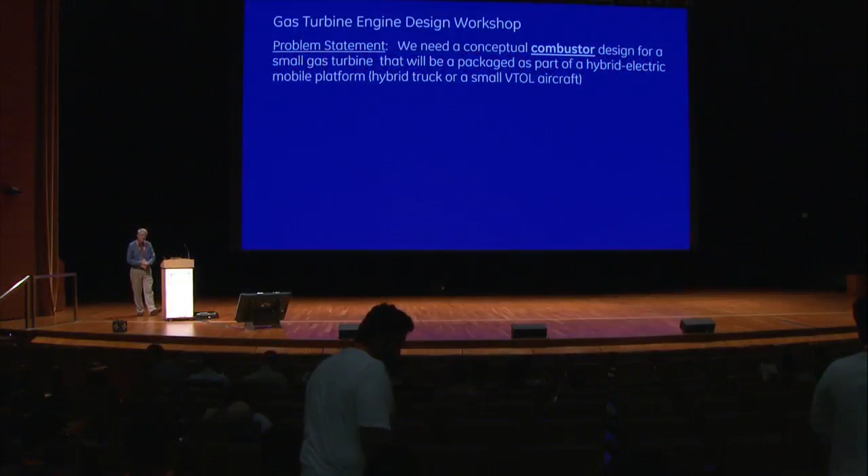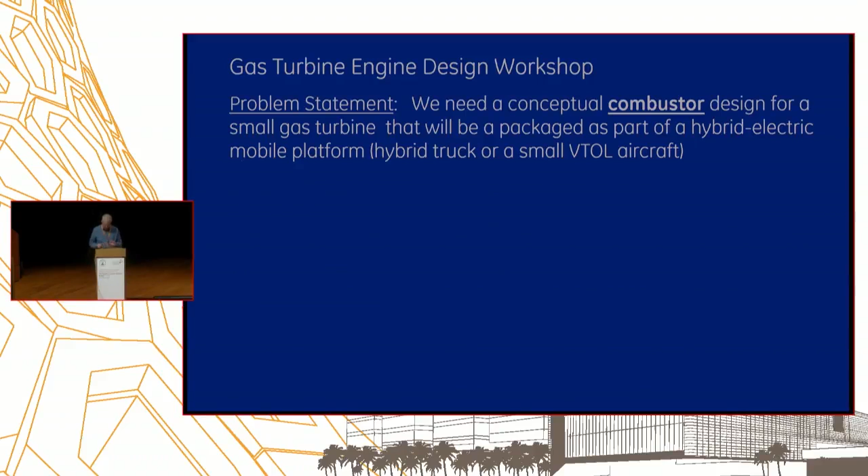It's almost 1:20. So I left you with a question, and I thought I'd start by explaining a little bit why, and then we can talk about what you're going to do and how you're going to help me.

So here's the thought. In today's world, gas turbines tend to be big and used for things like propulsion, and reciprocating engines tend to be used for small applications and sometimes grow into big ones. I thought I'd show this plot. This is a plot of, if you're thinking propulsion, a mobile platform, whether it's on the ground or in the air, you probably want to think about power to weight.

This is where gas turbines typically excel because they're very compact. They don't need to have the same number of auxiliary systems. They don't have the equivalent of a crankshaft and connecting rods, things that are pretty heavy. So this is a plot, non-dimensionalized, but it's based on some real data of a particular gas turbine and a few reciprocating engines. What you notice is reciprocating engines can be much more efficient.

So if you ask the question, why would you consider a gas turbine for a lot of applications, you probably wouldn't. Especially if you look at a gas turbine at part load, its performance falls off. As I said before, once you're at full speed, your shaft is turning at its desired speed, and you're pushing all the air through. So all the losses associated with compressing and expanding air are there. Then as you add more fuel, it gets more and more efficient to its peak point. So if you have an engine that needs to vary in load a lot, reciprocating engines are even more valuable.

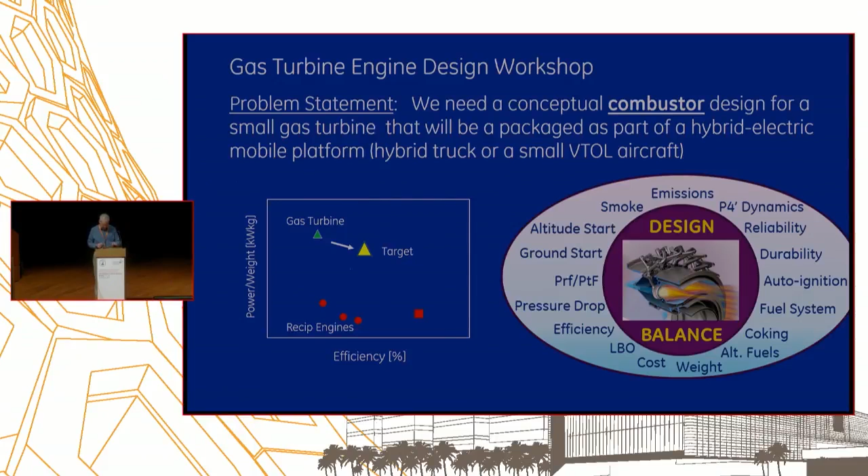And to start with, I just wanted to spend some time talking about requirements. Bear with me, because instead of a blackboard, I'm going to use a stylus here and write on the board. So you're going to see my handwriting through a stylus. And if it's not working, tell me.

So first of all, if you sort of think about the top 10 list, what does a combustor have to do? Help me write a list of requirements. It has to diffuse the flow, okay? And why is that important?

Okay, actually, and that's awesome. I was going to get to that later, but I'll diffuse the flow because that's an important point.

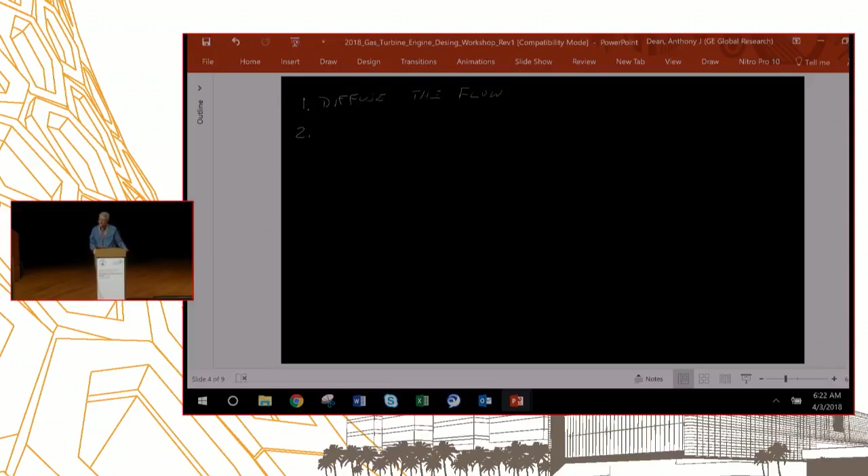Okay, let's talk about the function of the combustor. Why do we have a combustor in the first place? Burn the fuel, okay? So really, I've literally had these design conversations. Someone says, I got a great idea, and let's say the combustion efficiency is 98%. Does that feel good?

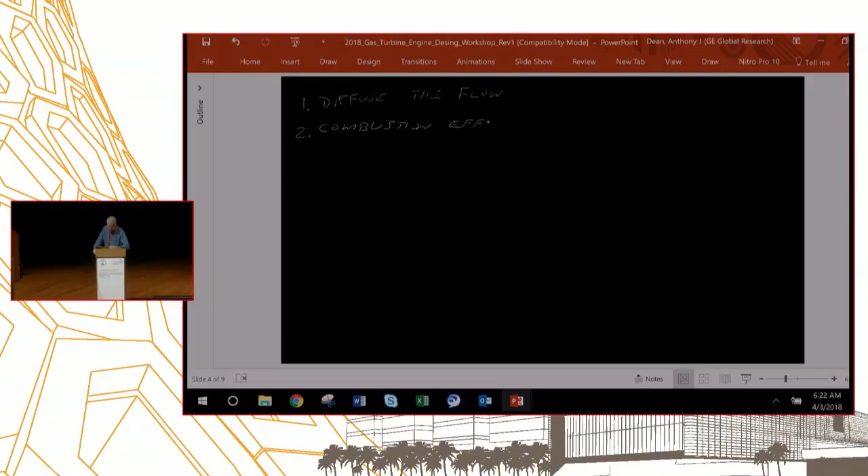98% combustion efficiency? That is awful. And there's two reasons why it's awful. First of all, we do all this work to make efficient cycles, and we try to control losses and have efficient components. But if I'm not burning the fuel, I'm going to have all those unwanted products we talked about, CO, unburned hydrocarbons. So you really want to be very high efficiency, way more than 98%, to be a practical and useful device. There are cases, if you look at an old two-stroke marine engine that goes in the back of a fishing boat, those are not very efficient. But that's because people aren't using them for many hours in a day necessarily, and there are reasons why they chose that. But for most engines, it's got to be much higher.

What's another requirement? Because if you start with the requirements, then we can think about a design. So, other requirements?

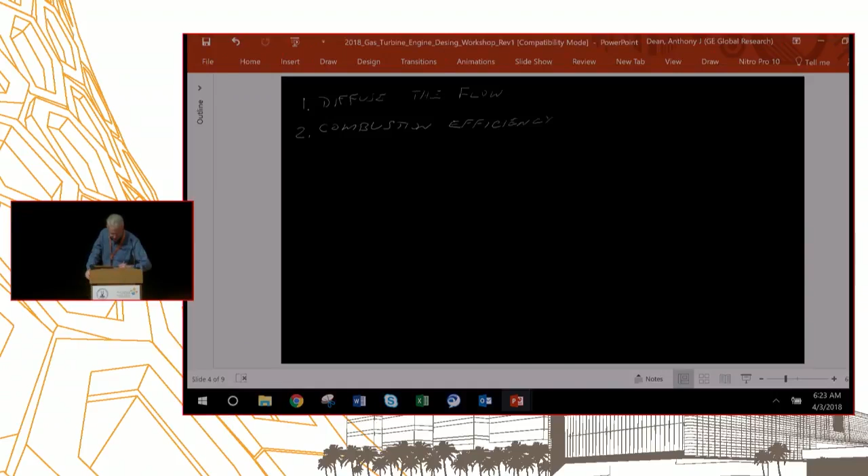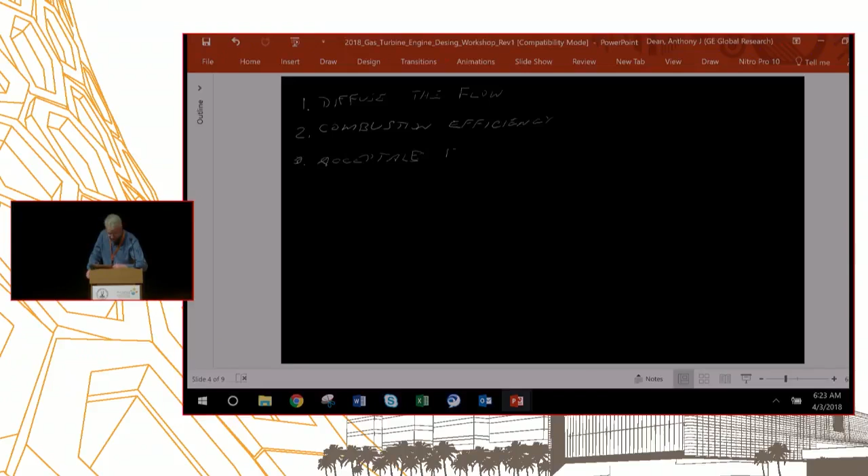Yeah, so achieve the - in fact, I'm going to build on that and just think about getting the right temperature for the turbine and temperature distribution. I'll say acceptable, and all of these things can be turned into numbers. But there's a notion called profile and pattern factor for an engine. Because if you're a turbine designer, you don't have to have the temperature be perfectly uniform, but for sure you have to know what it's going to be. So I'll say acceptable temperature for turbine. For example, if you make the combustor too short, you might end up with really hot streaks, in addition to other problems like maybe incomplete combustion. What's another key requirement?

In the end, mixture ratio - so tell me more what you're thinking. Is it the degree of mixing? What is it about the mixture ratio? So I'll just say, and again, I'll use the term acceptable mixing. If it's a rich combustor, it may get a different requirement to be acceptable versus lean. And where my head went when you said that was, in the end, the fuel-to-air ratio is given to a combustion designer by the cycle. The cycle is going to say there's this much air, you got to make the power we said we're going to make, you're going to add this much fuel. So in the end, the overall fuel-air ratio is given to us as an input. But as a designer, my requirement then is to take that fuel-air ratio and decide, for example, how hot to make the reaction zone, right? Where to put the air, and I can move that air around. Other requirements?

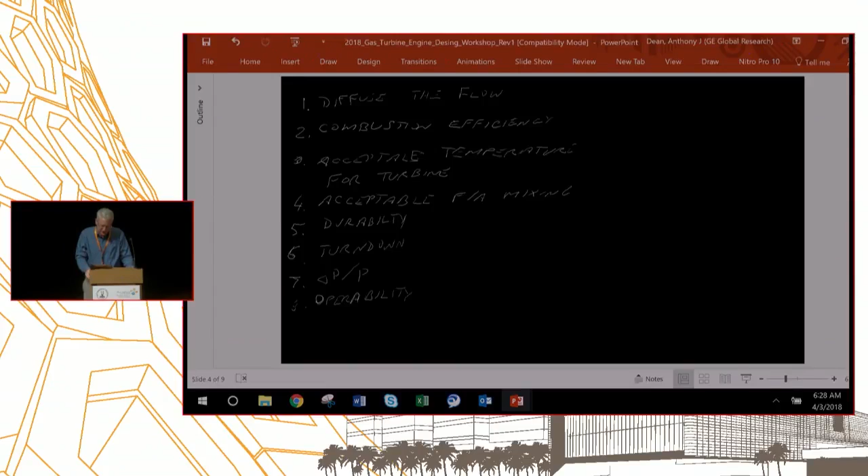You're actually doing a great job. I've got a list I'm looking at, and you've got eight of the items on the list. What about when you buy a machine? What's important when you buy something?

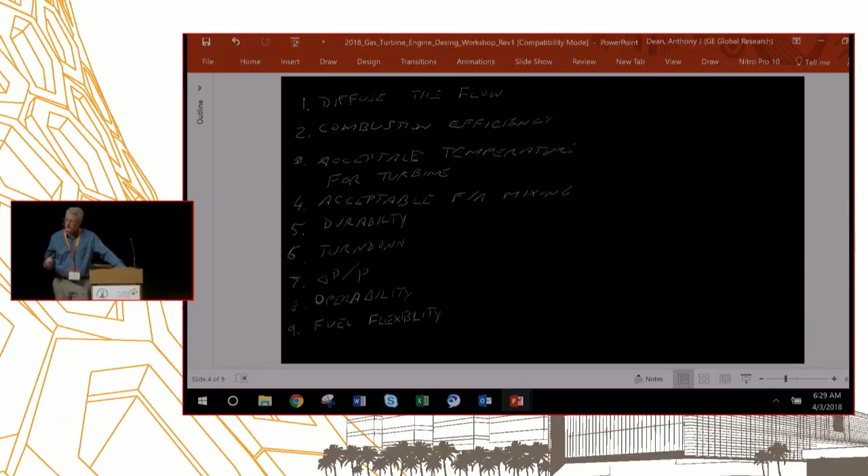Fuel. Are you sure that the fuel you have is the one you'll always have? Especially for utilities, one thing I didn't realize until I was in this industry is that if you want to build a power plant, often you're using someone else's money. So it involves a bank, it might even involve insurance folks. And they only care about one thing: are they going to get their money back, plus some reasonable return?

So they worry about whether the machine itself is going to be reliable, but they also worry about what if that fuel is not available and you had to burn something else. So fuel flexibility is sometimes more of a theoretical construct than a practical one, because a gas pipeline might be very, very reliable. But in order to get approved for that bank loan, you may need to show that on a bad day, you could burn a different fuel. That often drives some of the design.

Other thoughts? Geometry. So tell me what you're thinking. Perfect, so you've got to integrate it with the rest of the engine.

Turbo machinery designers have lots of interesting thoughts. If it's a compressor, is it an axial compressor or a radial compressor? So the air either comes straight at you along the axis of the shaft, or it might come radially outward, and then it's got to turn. So it's got to be compatible with the engine.

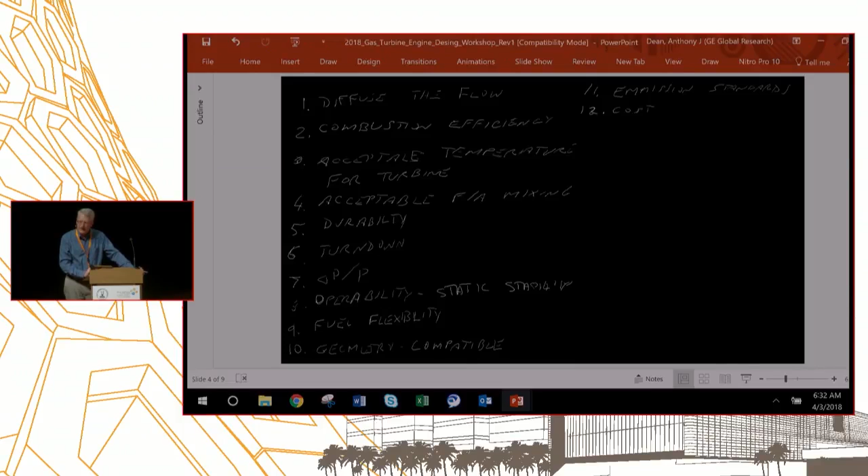In the back? Absolutely, right? So what I've learned is engineers are very creative. And actually, they become even more creative when you tell them cost is important too. But sometimes we want to add features, and a lot of conversation becomes around whether an idea buys its way onto the engine. It can be a great idea, it can even work really well, but is it worth the cost?

And the cost sometimes is actual money, the cost can be weight, it can be a cost in reliability. So there's all these things you've got to think about. But ultimately, if you're going to sell something for a profit, you've got to make sure you can sell it and make it at a reasonable cost.

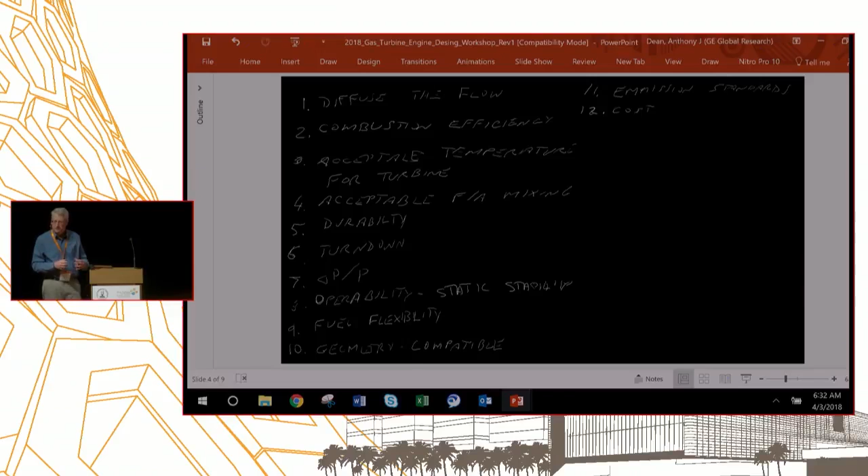I think we've got a great list. I'm just looking at my list here - I think you got a couple more I didn't have. Anything else anybody wants to add? Sorry? Insulation.

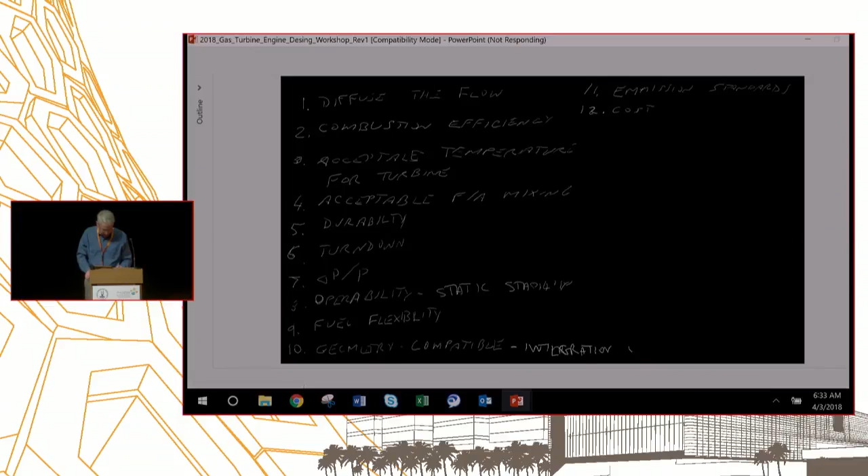Could be. So that really is integration with the engine - whatever the engine needs, it may require insulation, it may not, it depends.

One more in the back? Sorry? Power out? Yeah, and so in the end, that translates to - typically that's an engine requirement, but it's really the fuel-to-air ratio you've got to hit, it's about your T-exit for your combustor, right? It's whatever the cycle is demanding of you to achieve that.

One more? Sorry? Control, absolutely - so that gets into operability, I'll put controls here as well. Learning how to write with the pen here. Great, so that's not bad. We've got a really good list here.

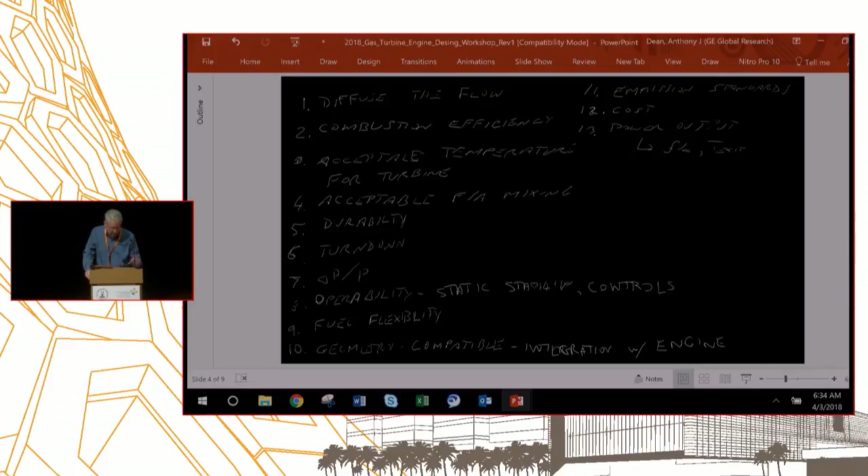Let me jump to the next page. And I think, because I have - once I learn how to change pages here.

And next, here's a nice tidy list of what I came up with.

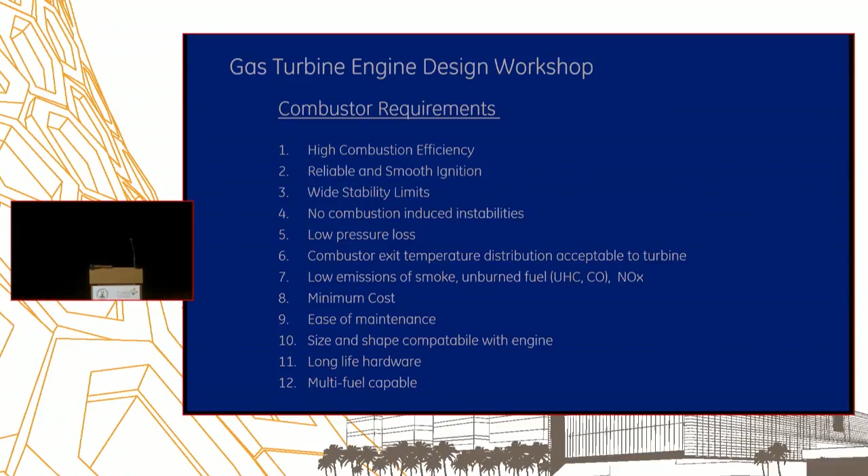I want to give credit to a lot of this section I'm talking about. In fact, I'll show you. There's a fantastic book, if you're interested in gas turbines, called Gas Turbine Combustion, by Arthur Lefebvre, a very well-known person in the field. I had the pleasure to meet him a couple times. He was visible at conferences and went around to companies and paid visits. He did an awesome job collecting the information that others put together, and he was also very active himself with his own research group. This isn't the newest version of the book, I think there's a new one now.

There's also a great book, Atomization and Sprays. But a lot of the material I'm using this afternoon really is pulled from the Gas Turbine Combustion book. It really sets the standard and gives the right fundamentals.

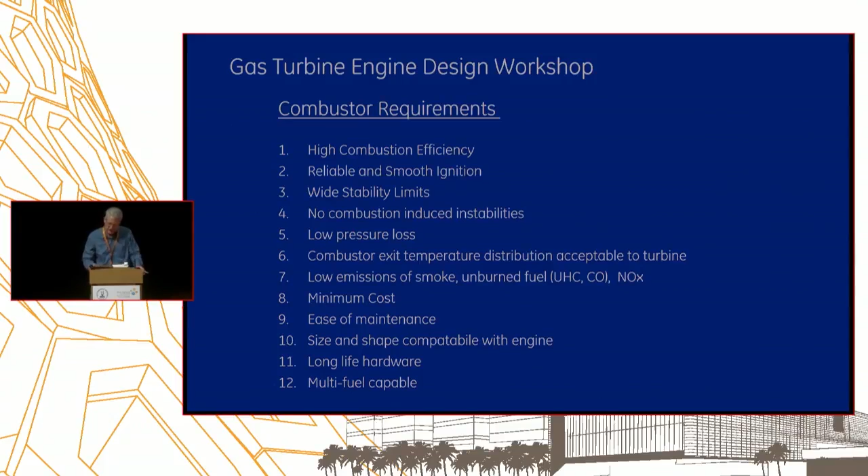So I wanted to go a little deeper on a couple things before we go into our exercise, and really help think through what a combustor needs to do, and what are some of the important things. So if you think about the simplest implementation, I have a duct and I have air going through.

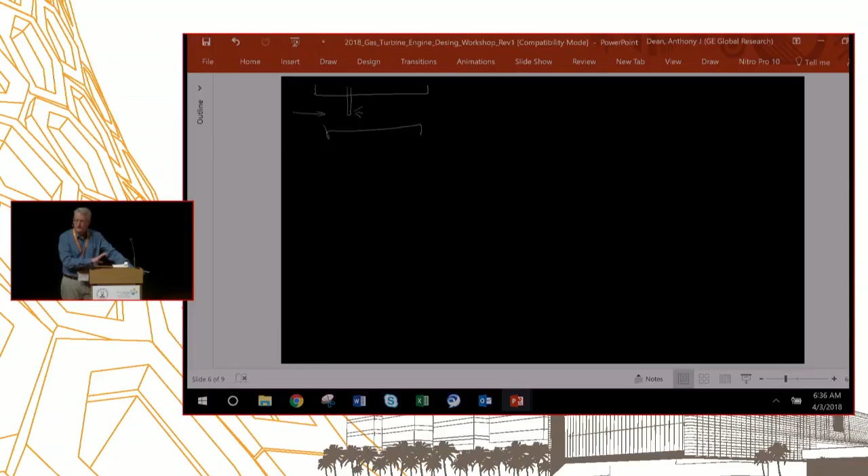This could be an annular duct, say what's coming out of the compressor. So if I want to squirt fuel in, one could imagine if you're trying to make the simplest combustor possible, you would simply stick a fuel nozzle in, it would spray some fuel in, and we'd be done. So help me out, what are the things that are not good about this as a combustion system? What would be the limitations compared to that requirements list?

Absolutely, so actually we've got to draw this a little differently. And why is that important? Why is it important to slow the air down?

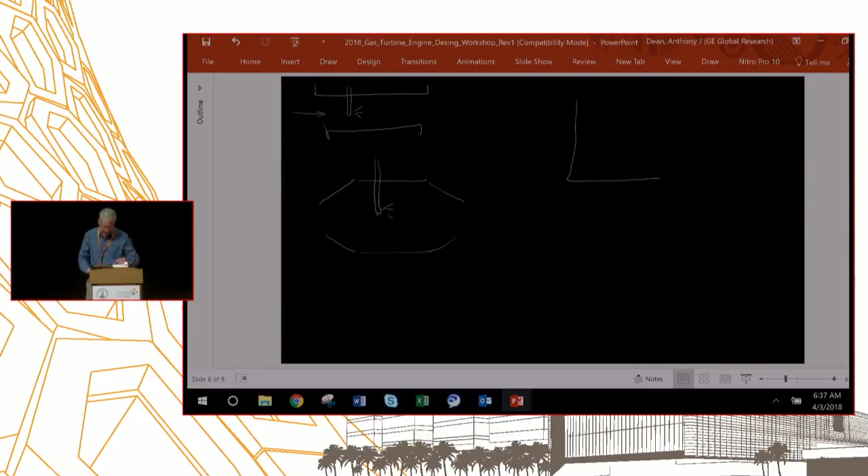Well, we'll get to that, because this may help, but will it be good enough? The thought I want to leave you with is a critical curve around - we said that delta P over P is very important - and if I were to talk about the velocity, I'll put it in terms of Mach number, the Mach number at the place of heat addition. So the Mach number when I'm adding heat. Is that a steady curve, or what do you think it does?

It decreases? Actually it does the opposite. If I'm at very low velocity, I can add heat to air and life is good, okay? But if I'm high velocity, and actually it's a quadratic relationship - on this curve I'll give you some typical numbers. If I'm at Mach 0.1, I'll see about a 1% pressure drop. So even if I'm aerodynamically beautiful in terms of not having flow structures that cause pressure drops, just the fact that I'm releasing heat into high velocity fluid causes this.

And so if I get to a Mach number of 0.2, I can be - I'm just looking, and it depends how much heat I'm adding. A typical heat addition would be a temperature ratio, on absolute coordinates, of about a factor of 3. That's why the density will change. But I could go all the way up to 6%.

So if we have a budget of 5%, and I said I want to be an awesome combustor, right, I'm going to be high velocity, I'm not going to take that air from the compressor and slow it down, because why would I have a diffuser and all that claptrap? Well, I've suddenly lost my pressure budget, right, just because of heat addition at high Mach number. So fundamentally, you've got to slow the flow down, to something below Mach 0.1 would be a good rule of thumb.

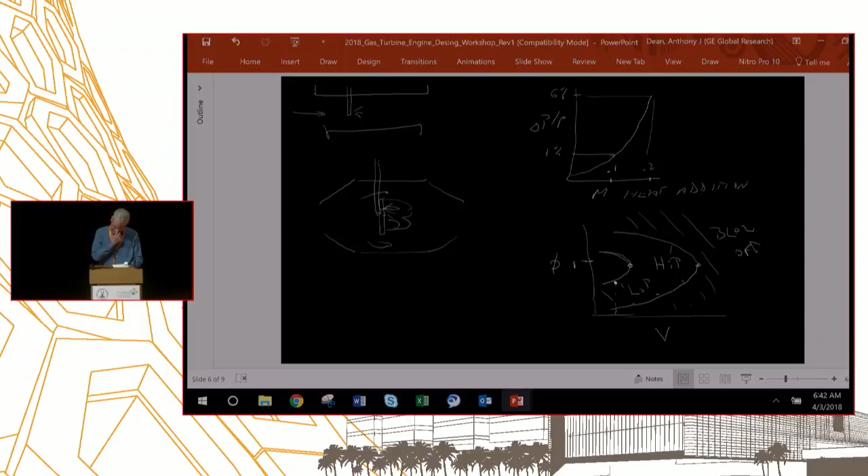And then I got to say, oh, and by the way, I'm not actually phi of one, because that would be high temperatures and maybe high NOx. So now I'm somewhere leaner. And now I've got to be thinking, okay, what's that velocity for my flame stabilization method? So that becomes something to worry about.

Think about the other requirements that we have. What's the other issue? So there's more issues. We've got to sort of add more components. What's another component you want to add to what we've drawn?

Fantastic. So imagine that if this is sort of the out on the outer, I'll have to say this is an annular combustor and this is the outer part. That's the casing. I need to put a box around this because I don't want that flame to have hot products hit the wall of my pressure vessel.

One of the fundamental parts of a gas turbine is typically we have cold structures that take the pressure and we have hot structures that take the temperature and maybe handle the pressure drop across the combustor, but they don't have to withstand the whole pressure ratio.

So we've got to start to put a boundary around this thing, and that then starts to look like the cross sections you've seen. You've got some sort of structure and casing. This might be the outside world here. Inside here, there might be a shaft that's rotating, and we got to protect that shaft from getting too hot.

So we're almost done. What else would we want to maybe try to improve on this?

Absolutely. So it's all about what's the temperature to have a stable flame, and then what do I do? And if I was more capable, I would get an eraser, but I'll just put an arrow here to imagine we had drilled holes and we have some air, the rest of it. So really what this gives me is a degree of freedom to say in this region, I'm going to be having the right fuel ratio for very stable operation.

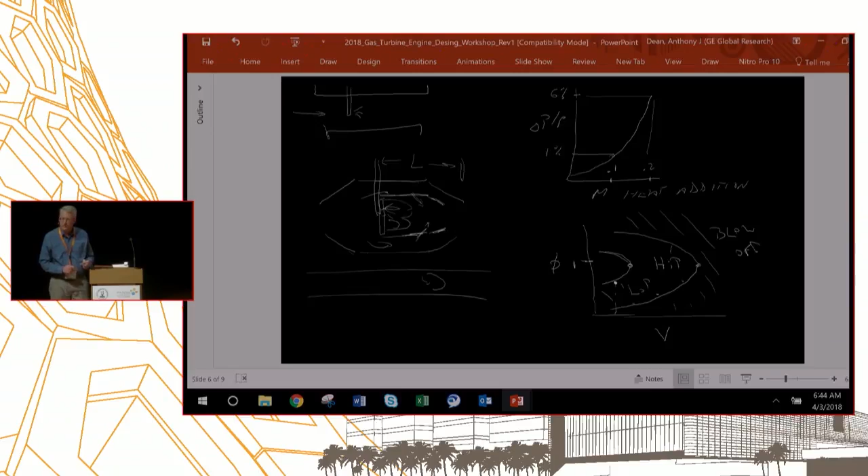So let me just see if there's something else I wanted to mention. The other thing that gets into, if we're trying to fix the length, what are some of the factors that would be important in terms of the overall length of our system?

So I heard residence time, and here's something interesting. Residence time for a combustor is the volume divided by the volumetric rate of air. If someone asked what's the residence time, you could say give me a CFD, I'll integrate and figure it out based on some complicated set of measurements. But very simply, if I know what my compressor is putting out in terms of pounds or kilograms of air per second, and I know the temperature and pressure, so I know density, I know the volumetric flow. If I know how much air is going into my combustor, then residence time at the macroscopic level is simply the volume of the combustor divided by that volumetric flow. So it can be very easy to calculate bulk residence time.

So that's important. When we think about that, let's put it in terms of time. Actually, I'm going to do one over time. What are the factors of time that are important when I think about how much time I need?

So there's time for the reaction, and CO tends to be the slowest one. If I have a CO requirement, I have to make sure I'm respecting that time scale. At low load, you're at low pressure, so I have to respect the time scales at low pressure, not just the ones at full power. So time scale for chemistry is important.

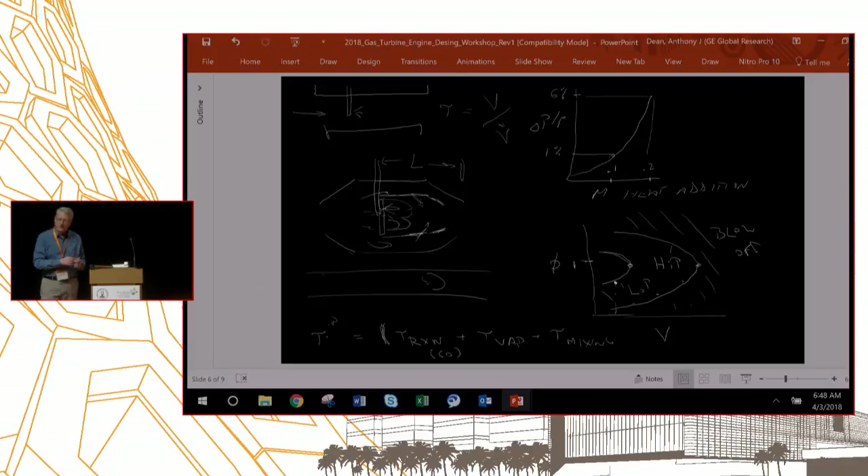With some really simple thinking, you can start to lay out a design and keep a few things in mind: how much time do I need? This is where you can go back to some of the Chemkin calculations and subroutines that were talked about. A plug flow reactor, a perfectly stirred reactor, those can start to give you the times to guide how you think about the aero design. And once you have an aero design, you can think more about the mechanical packaging and durability. So those are some of the main ideas I want to talk about.

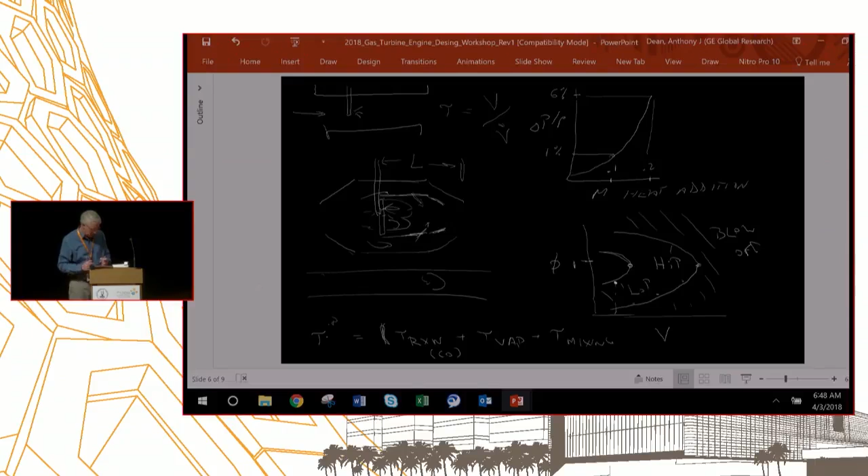I now want to give you a chance to break up into groups, and I have an exercise for you. I'll pose the questions, and then we're going to come back and talk about them. To help with time, if we had more time we could make this a more open-ended discussion.

But for each group, does everybody know what number you are? Anybody not know what number they are? Okay, so whatever number's on your tag is the question you want to focus on, though you can look at the other ones too. I wanted to start with things like architecture, how we're going to stabilize the flame, fuel or mixing, and there's just a couple of choices that you have.

Imagine you're a new hire into a company and someone says, look, we're in a hurry, we have to get a proposal out by Friday, we need you to look at this thing. When we put together our final proposal, you need to help us. So that's what we're going to do as a team. You're going to break up now for the next few minutes.

Within your group, I want you to discuss and debate which choice. Then you're going to have a representative of your team, and you collectively are going to define this combustor. Then we're going to talk about what we like about it and feel good about, and what are the areas where we think there's risk. So that's how we'll start. For this discussion, you're welcome to stay in your groups here. Let's give you 10 minutes, and then we'll come back together at 2 o'clock and be ready to explain your choice.

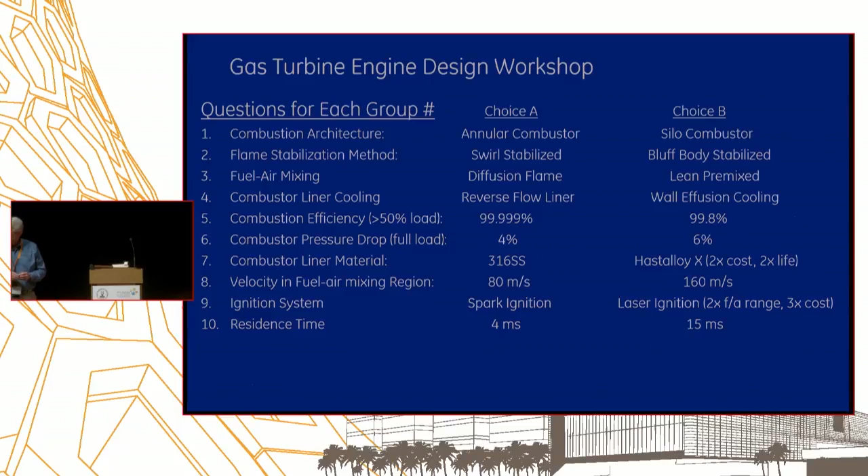Just to clarify, let's do A 1 through 5, and B 6 through 10, since they're grouped up, A and B. Oh perfect, okay. No, it's A 1, 2, 3, 4, 5, and then B 1, 2, 3, 4, 5. Oh, so you're saying we have 2 groups in the end? No, there's still 10 groups, but they're not numbered 1 through 10. They were A 1, 2, 3, 4, 5, and B 1, 2, 3, 4, 5. Oh got it, okay, so it's A1, A2, A3, A4, A5, and then B starts at 6. Got it. But your choice in each one is A or B for the question. All right, so you got 10 minutes.

He wants to know what's the target for the gas turbine. It's the one we talked about before: the hybrid electric small gas turbine that's going to wipe recips off the planet for these applications. That's our mission today, okay?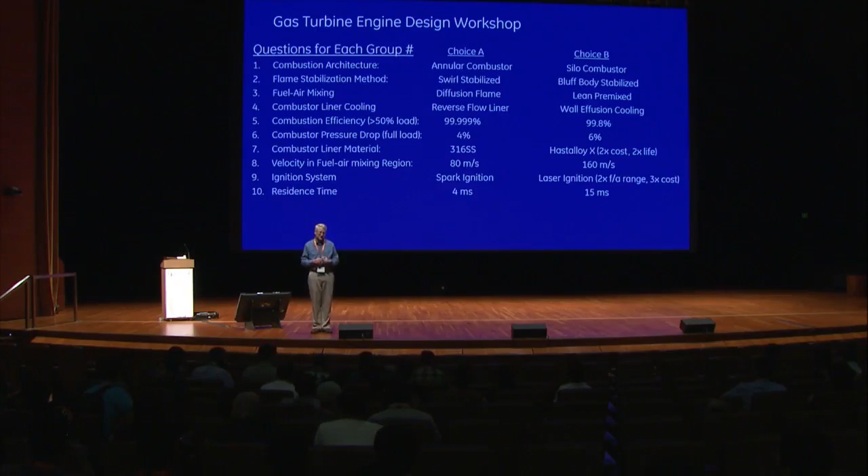All right, so I'm going to call on each group here. Group 1A, tell us what combustor architecture we're picking and why.

Okay, our answer is it depends. That's not allowed, okay? So if you want to pass this section, you're going to pick A or B, because actually, there's no wrong answer except that.

Okay, so you are giving us 2 options, right? The VTOL and the truck. But if we just pick one, we will go with A, annular. Annular, okay, we're going to talk about these later. I know it's a little bit forced here, but actually this is like how design gets done - you pick stuff and then you start to debate whether you like it or not.

Okay, group 1B, flame stabilization method. A2. Yes. So it'll be swirl stabilized, that's what we are going with. Okay, most gas turbines are swirl stabilized, so that's a pretty safe choice.

Better mixing and better control over the recirculation zone, that's what we're going for. And we'll talk about this more - most gas turbines are swirl stabilized, and they also suffer hydrodynamic modes and instabilities because they're swirl stabilized. So those are the trades - that's what you're signing yourself up for when you pick swirl stabilized. Final answer? Yeah, it's fine.

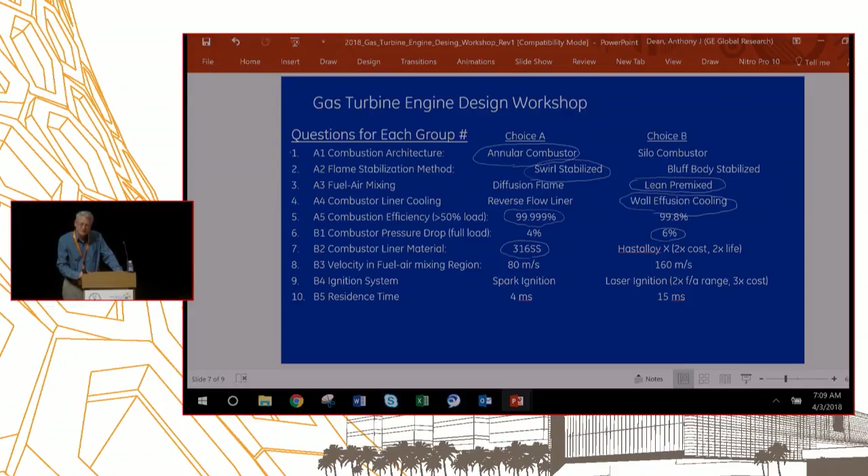So, what choice did you make? So based on the application, which would be relatively simple, we'd go with stainless steel, since the maintenance cost would be much less, and the initial cost would be very low. So that's the kind of trade you want to think yourself through, right? This is lower capital cost, likely, and if we're trying to beat recips, recips are known for being inexpensive engines, so how do we get there?

All right, B3, velocity in the fuel air mixing region. Okay, we will choose 80 meters per second, so that we have higher residence time, particularly if we are talking about liquid fuel, so that vaporization and mixing has enough time. Okay, yeah, and the debate will be, you've chosen a lower pressure drop, which is awesome.

So that'll help our 6% friends. The question will be flame holding and flashback in that region, but you might be okay. 80s is probably on the good side of that boundary.

All right, we've got to ignite this thing. How are we going to ignite it? We were considering spark ignition first, but since the cost of the ignition system relative to total cost is not high, we can afford a 3-time cost increase. Since the combustion will be lean premixed, we think laser ignition will be a better choice for a higher operational range.

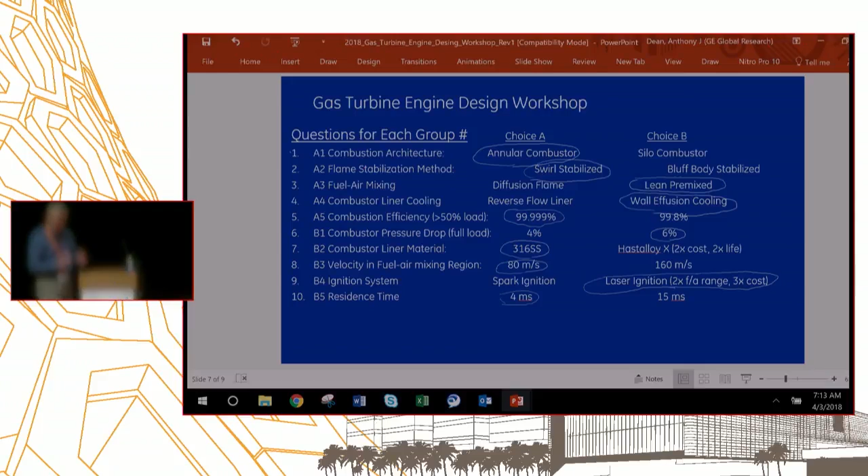Let me give you some thoughts to think about - an annular combustor, reflecting on some things I mentioned earlier. How do I fix this thing? It's a little engine, and that's good news. Compared to a big engine, if it's going on a medium truck, it's probably not that big, so for maintenance it's not a bad choice - I could tell my customer I'm going to swap engines when you have a problem. So even if it takes a little longer to fix, it's going to be good. The other value of an annular combustor for this application is it keeps it small and lightweight. This is the most compact form of combustor of the choices you've seen, and it also means the temperature profile into the gas turbine will be pretty uniform. So this is probably the best choice for a little engine and for keeping it simple.

In terms of flame stabilization, you picked swirl, and that's how most gas turbine combustors are stabilized, for good reason - what's good about swirl is the debate becomes what swirl number and how strong that recirculation zone is. The good thing is you end up with an aerodynamically stable structure that probably doesn't change a lot over the operation of the engine, so I have a flow structure I know and understand. One problem you can get into is the flame may be able to sit in more than one place during operation, and if it's ever near a boundary - location 1 versus location 2 - it can bounce around, and that's a form of instability that's undesired. So having clarity of where I want the flame to be stable, as a structure that's stable over the operating envelope, is very valuable. But as I mentioned, if you have a swirling flow, you end up with a precessing vortex, and that does interesting things in terms of heat release spatially and how that may or may not couple to an acoustic mode. So that's a watch-out, but overall it's a good choice.

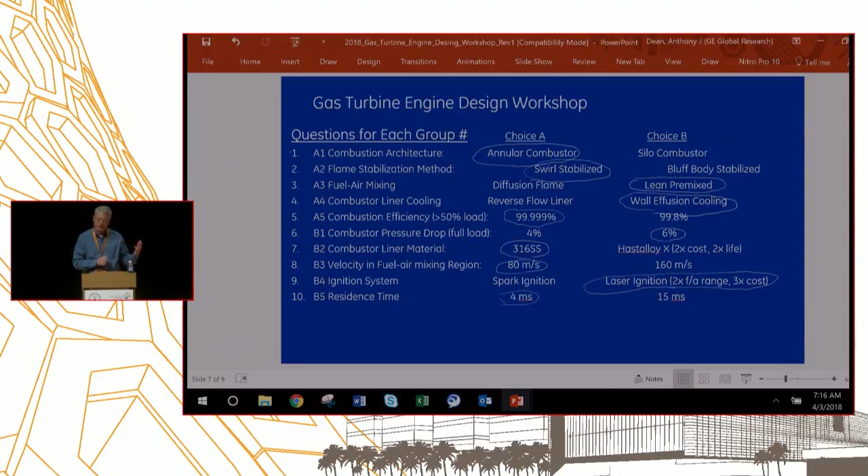It's a great thing to put on your brochure. If you're trying to sell this thing, you want to say it's a low emissions engine. Whether the regulations apply or not, it's great to be able to say it's a lean and efficient engine. So that's a good choice.

Liner cooling: given that your friends picked 6%, you could probably afford a reverse flow. But reverse flow is more metal, it's more weight. Going with effusion wall cooling is good, but it does add cost, and it depends how you put holes into the material. There are different technologies for drilling lots of small holes, but all of them are fairly expensive. So this type of component can become more expensive, and that would be the trade for such a design team to work through: how do we do this at lowest possible cost? But in terms of durability, and being lean premixed, some sort of wall cooling is certainly desirable.

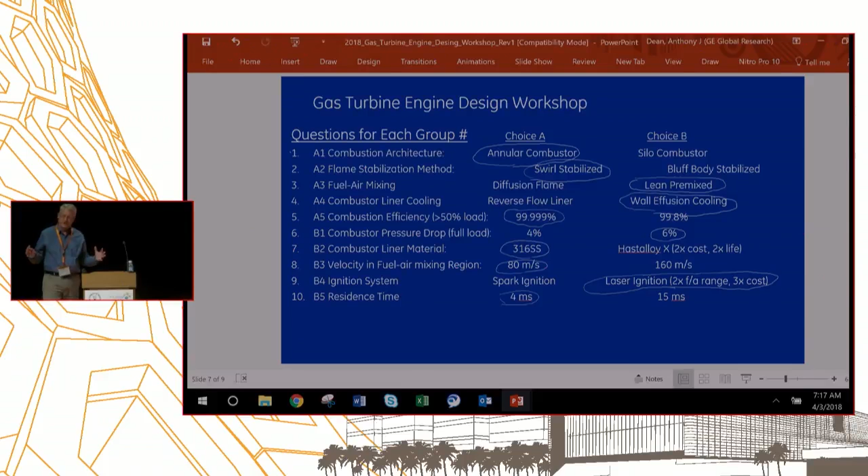Combustion efficiency—I think this is in the same category as emissions for me. You want to be as clean burning as you can, but there is a cost. This combustor would be bigger. If you were part of an engine design team, there might be a goal for weight that gets split into different groups. The combustion group would get a choice, and the choices the combustion team makes also affect others.

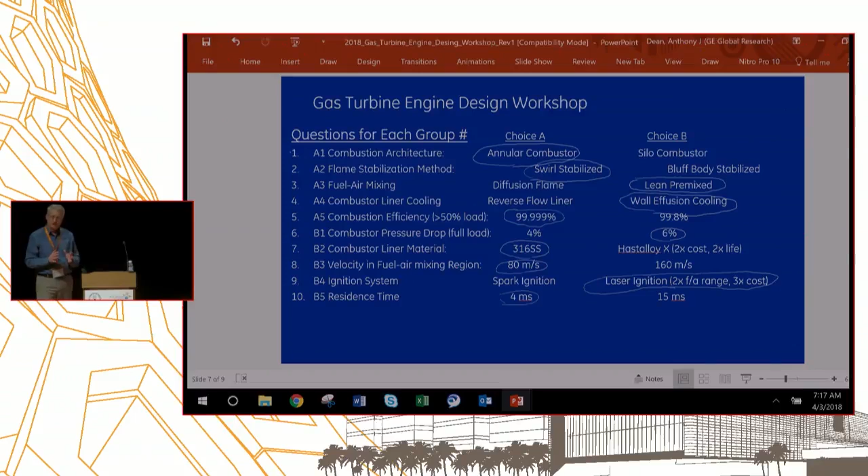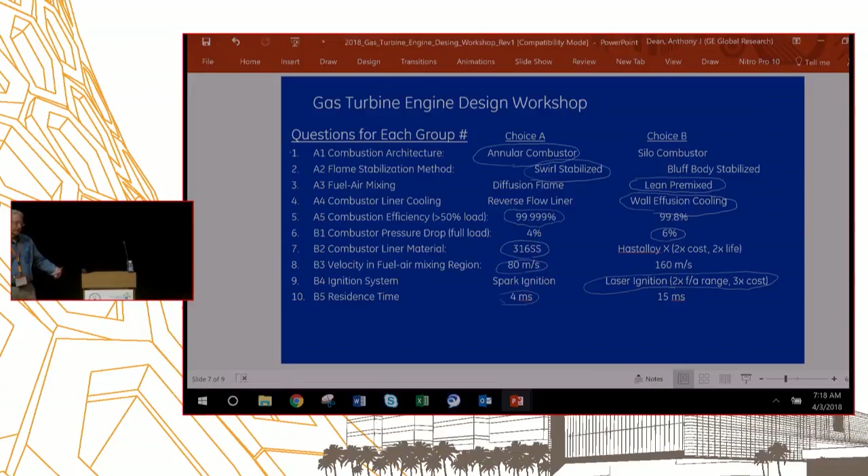For example, if you have more residence time, which is what we're really saying to get the combustion efficiency, it might mean the engine's an inch or two longer. So it's not just the weight of the combustor, it's the weight of the casing, it's the weight of the bearing structure. With rotors, you get into rotor dynamics, more modes and more interesting modes with a longer shaft. So you get into engine integration, and that's where you get into why you're making this choice versus another, and how it interacts.

But as starting points, these are great places to start. The pressure drop...

6% is making your life easy, and because you can afford to do reverse flow, you can afford to do lots of things. But you are making it harder for the cycle performance person whose job it is to meet whatever efficiency requirements. So this would probably be a good point of discussion in a design team: what's the trade, what's the benefit of being at 6%, because there are benefits in terms of durability—you've got more air to do cooling with. There's some advantages to having a high pressure drop, but you are hurting yourself from a thermodynamic performance point of view. So that trade, you need to get to derivatives and really make sure you want to stick with that choice.

The combustion liner material—I decoupled it here, but the choice of material also goes with the temperatures of the cycle, and with the type of cooling I pick. Things like 316 stainless are fairly easy to work with, so that's good. If I'm trying to put holes in, I probably want to use that material. It's all about whether I can meet my minimum requirement. Today I didn't give you detailed requirements around how many cycles or how many hours, so we don't have a good way to judge that.

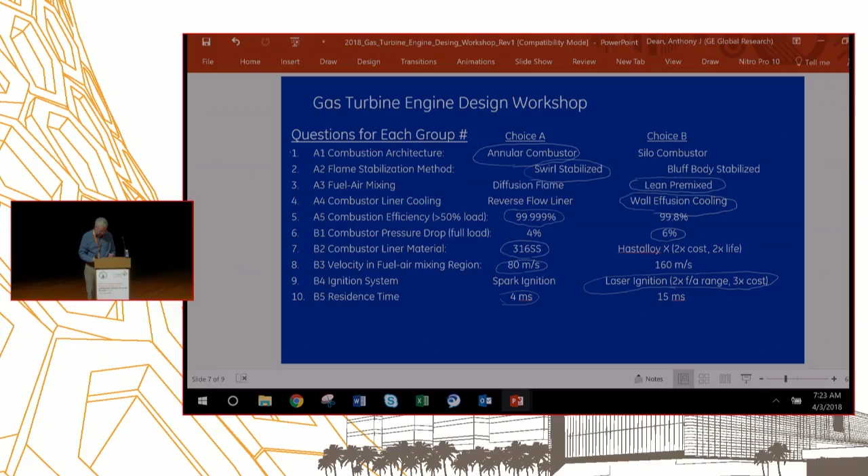But 4 is great from the point of view of it's probably a more compact system. In today's world, that's considered acceptable for aviation. For a small engine like we're talking, it probably wouldn't be as high a pressure ratio. So again, 4 is sporty, and if I were to just say what I think is risky in the choices we've made, I would think that this is risky, the laser is risky, the really high efficiency is risky. And that's okay.

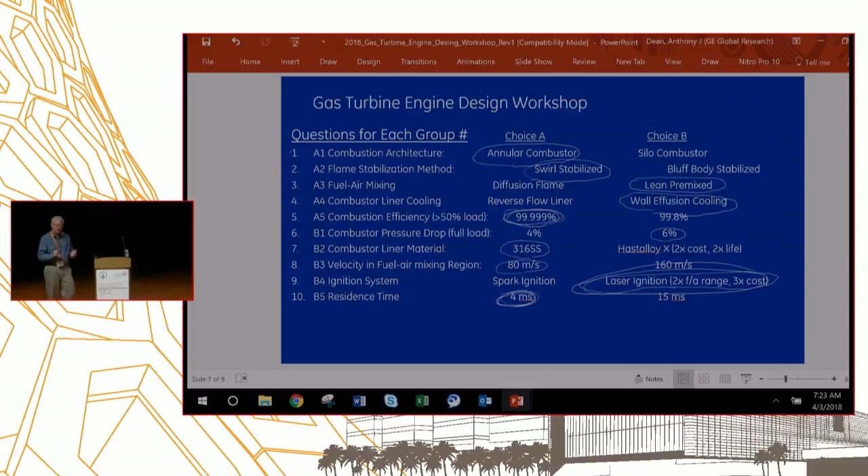When you make a design, it's all about making choices. And if you take no risk, you're probably not going to be differentiated, and you'll have a Me Too product. So really, when you're in design, it's really about picking where you want to differentiate. But you have to be ready for your competition to do the opposite. And when they do the opposite, and they say how good their choice is, you have to be ready to say why your choice is the right one.

And like I've said many times, for me, some of these choices, there's not really a right and a wrong, but we can add all these up. We can start to have things like cost, weight, reliability, development risk. When you start to add those up, you can start to get a sense of what you're signing yourself up for.

So that's where we've landed. I think it's awesome. I want to take - really the next time - I've got more I could tell you about design. I've got 2 things we could do, so maybe I'll open up to you to help me vote. I've got some interesting material on pressure gain combustion, but I'm also very happy to spend time just talking about combustor design in more detail. So let's pass the ball around and help tell me what you're thinking.

I think it'd be great to ask some questions. From a practical perspective in industry, you talk about having teams that do different portions of the design, like we had different teams here. I wondered logistically, how does it work? Teams probably have a project leader, and then the leaders get together and discuss, and who ends up making the decisions, and how does it actually flow? And in the end, when you have a design, how do you empower those engineers who worked in the teams to really get their ideas into the final phases?

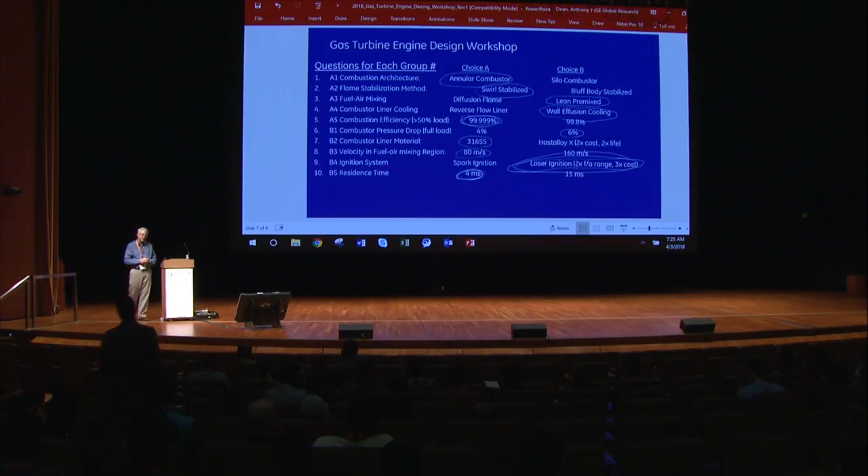Yeah, so I think there's many ways that it happens. Many companies have different cultures. Some companies, and actually even within a company, you'll have different design teams with different personalities. What I can talk about is different ways, and then strengths and weaknesses.

What can be very simple for a team is to have a very strong leader with strong opinions, and they would look at a list like this and say, this, and they'll make all the choices. And if you're lucky, they're going to be right. But if you want to make world-leading products, often one person is not smarter than a group of people. So a fundamental discussion in any team is: is the group, as a group, smarter than any one individual? And I subscribe to the group is smarter than an individual.

Because if someone is very strong and just makes declarations, how do you know they're right? How do they know they're right? Are you really debating the ideas? So successful design teams, in my experience, are ones where ideas come from anywhere. Now, it does help to have passion, it does help to have people with opinions. Laser ignition, they're all in, right? Then the other part of the group has to say, well, why would we do that? No one else has done it. Why would we want to be first? Those are the kind of debates that a healthy team will get into.

Just to help you think through how teams are organized: typically, I've been through a number of design cycles on a number of different engine platforms, and typically there'll be groupings by capability. So in combustion, the simplest separation is the mechanical design engineers and the aero engineers. There's people who worry about the flow path, and then there's people about the parts that then constrain and define that flow path. I've seen actually very interesting different organizations — sometimes you'll see those specialties in separate groups reporting to separate managers, but they'll come together as a team, a co-located team, to do a particular engine development program.

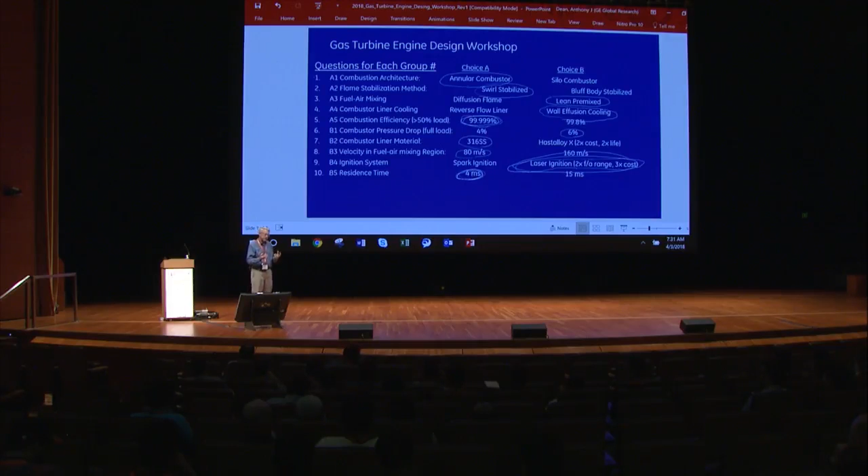When I think about propulsion, you have chemical potential in the form of fuel, and really there's two aspects to it. There's the thermal efficiency of the basic energy conversion device, and that's where combustion comes into it.

And then there's how you take that torque. In the end, most of these systems develop torque, and then where do you apply that torque? Conventionally, the simplest engine takes the torque from the low pressure turbine, runs that through a shaft to the fan, and it turns the fan.

That's true until you want bigger bypass, which means a bigger diameter fan. Then you say, the speed of that fan wants to be slow, so my tip speed's not too bad. But now my low pressure turbine isn't as efficient if it's turning slow. So how do you manage that trade? That's been the art, I'd say, as people make those trades.

One option is to decouple with a gearbox, so the fan turns at the speed it wants, and the low pressure turbine turns at the speed it wants. From an aero performance point of view, that's probably a good place to be. But now I've added an element that has weight, cost, oil, heat transfer. If you think about how gears work, they have to mesh, so all the torque goes onto gear teeth.

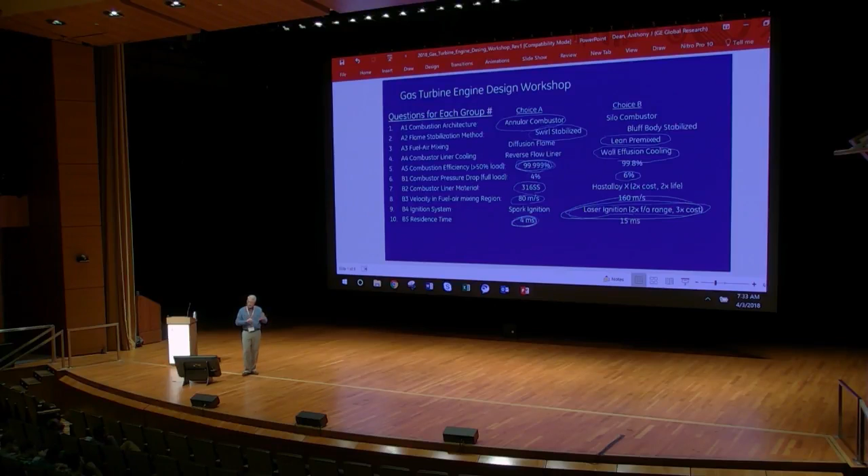What happens when you have a really hard landing or other upset conditions? You just have different elements of risk, fundamentally. It's been a risk-off trade for the aero designer, but now the risk is somewhere else. So I think where you're really getting to for propulsor efficiency is what happens as bypass ratio goes higher, because that's really the game.

And the ultimate, a good intermediate stop would be a gear. But at some point you say, why do we even have a fan? If a fan's so big and I want a contained fan, why do I want all that drag and carry around all that weight? Let's not contain it anymore.

And then you go to open rotor, which is a lot like propellers. They have different shapes and names, but in the end, open rotor isn't that different from a propeller. Those are great trades, a lot of intense debate in that industry. But in the end, the combustion guys aren't a relevant part of that conversation. Our job is to help create the device that creates the torque, and then we can have a debate about how that torque gets used.

I think the disruptor in that discussion is, what if I had an electric motor, a generator, and then wires, and I put thrust somewhere else? Now I actually kind of went well beyond a gearbox to just say, why not just have electric wire? But now that's a different set of problems, and I have losses, I have weight, I may have some advantages, I may have some losses.

That's what makes the whole area of aviation and propulsion fun, I would say. It really is about having the right debates to get the right set of requirements, to get the right product at the right time. So it isn't really about right or wrong, it's really about the strengths and weaknesses, in view of things like fuel cost and expectations about reliability.